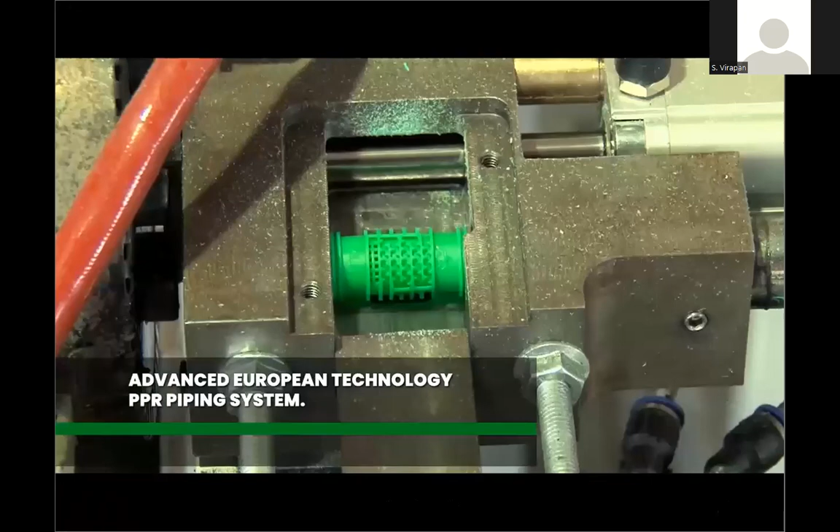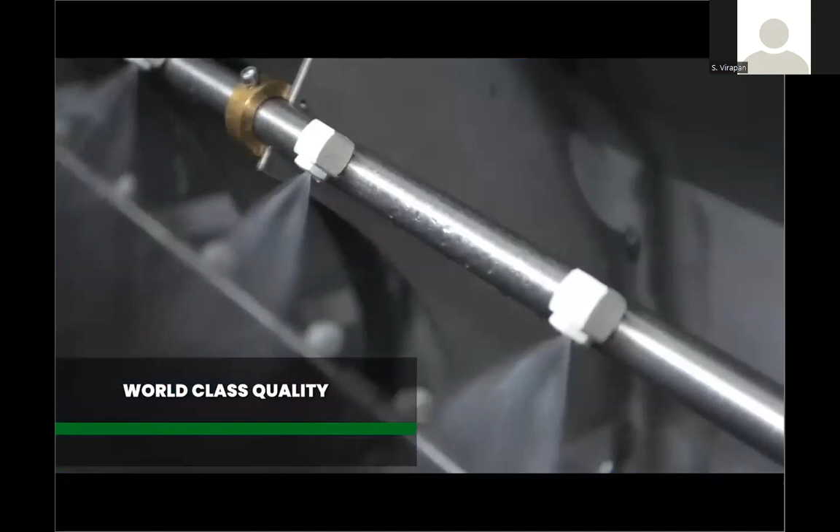A leader in polypropylene random copolymer piping systems, KPT Piping System has a state-of-the-art multi-specialty piping manufacturing facility and uses non-toxic, food-grade, highly strength fusion weldable raw material for production. To ensure world-class quality, KPT brings you a piping system made with R200P PPR raw material, 100% Hyosung from the Republic of South Korea.

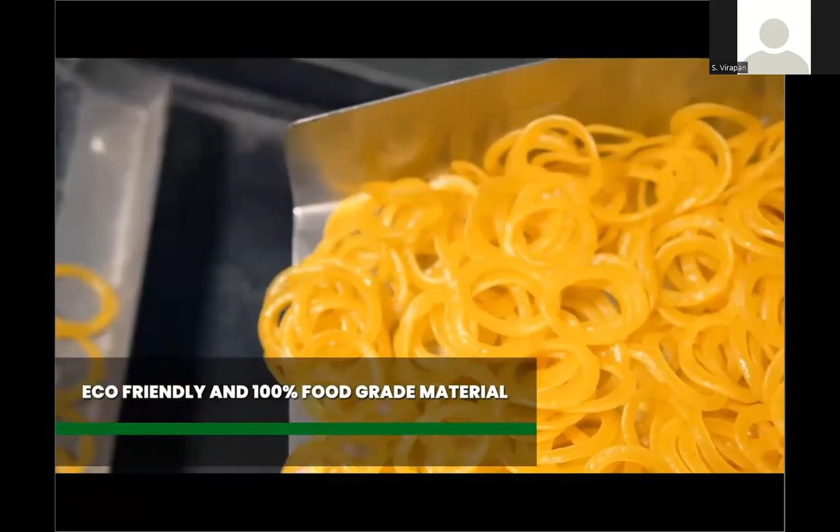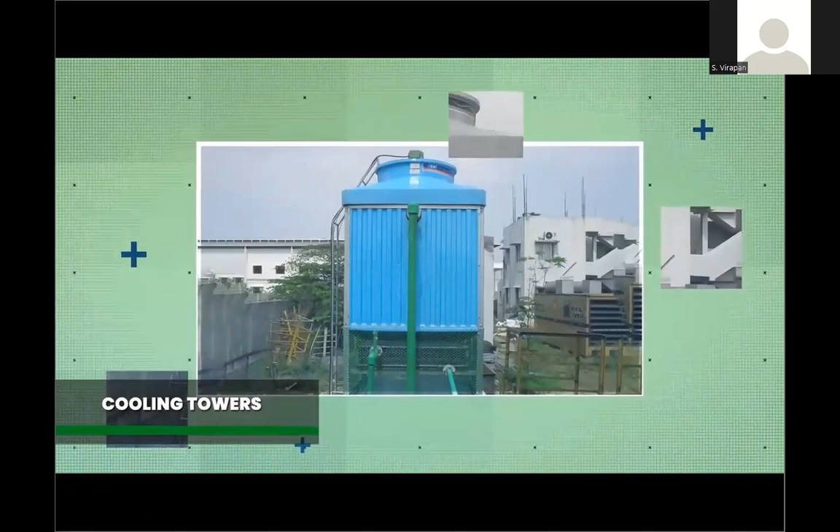PPR pipes are eco-friendly, 100% food-grade material, and resistant to most chemicals. PPR piping system is now widely used in drinking water, compressed air, cooling towers, firefighting, acids, RO, DM, ETP water applications, offering a longer lifespan of 50 years.

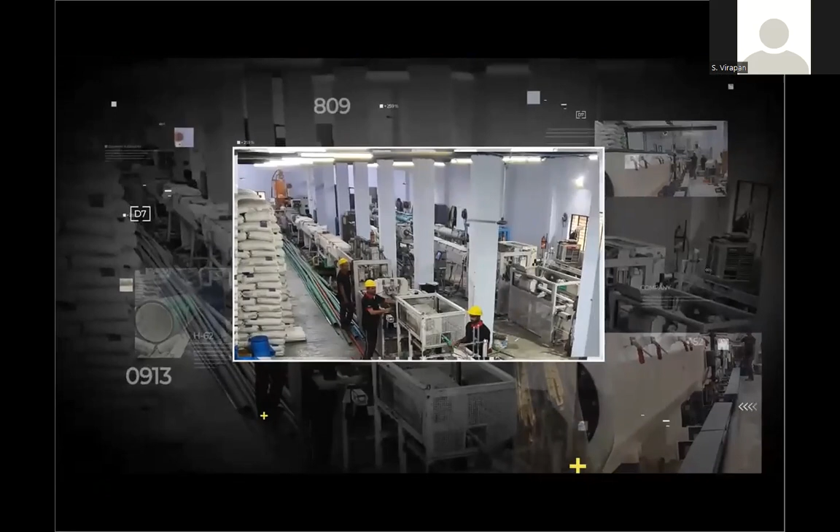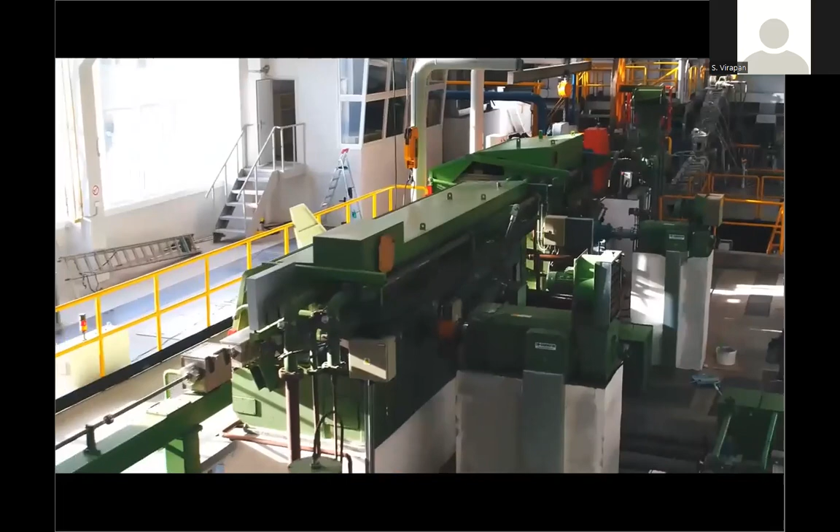With world-class PPR raw material and state-of-the-art production facility, KPT has successfully completed 2,500 plus complex projects for various industrial, commercial, and government organizations. Our piping system is now running for most critical applications like data centers, injection molding factories, and chillers all over India.

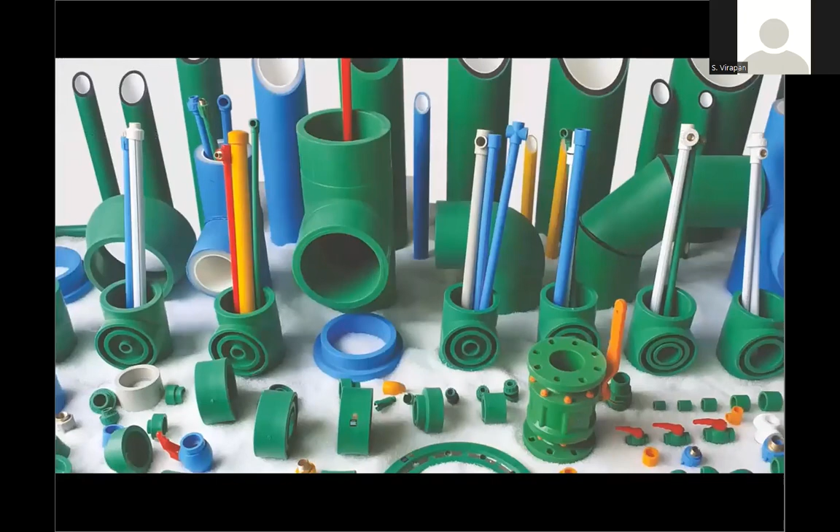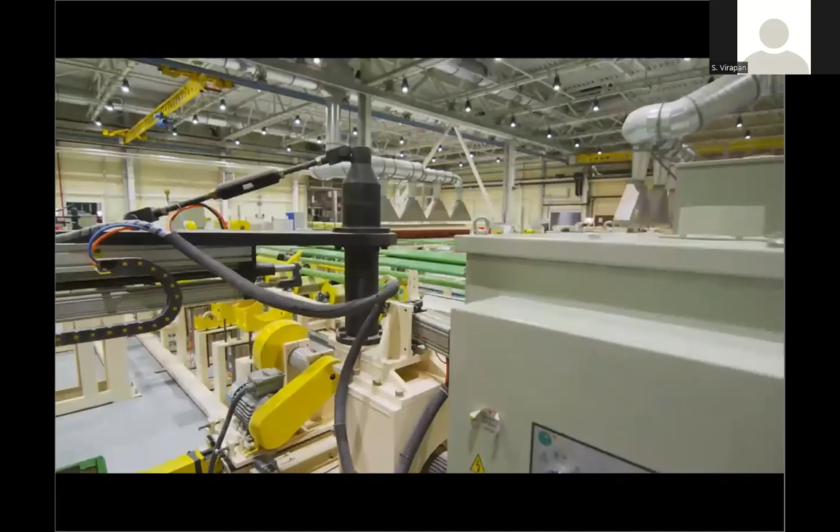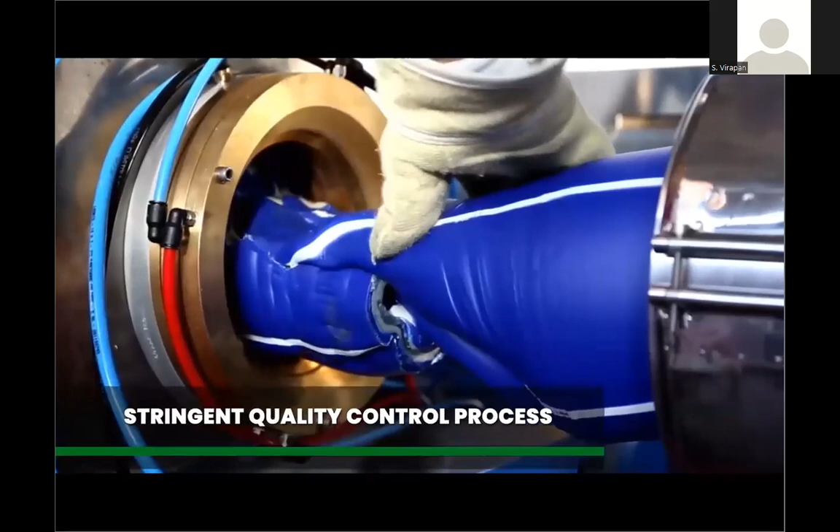Our product ranges: Pneumatopipes for compressed air, Green Therm for water applications, Thermoplast for firefighting systems. KPT's manufacturing facility, lab, and infrastructure feature a full-fledged, fully automated manufacturing facility with capacity to produce 15 metric tons of pipes per day. The unit has a fully equipped lab for material testing and quality assurance, adopting a stringent quality control process to ensure customers get only the best anytime, every time.

Our achievements: winner of India 5000 Best MSME Award for outstanding contribution in quality and excellence in customer satisfaction, and Pride of Bharat 2021 for the most trusted pipes manufacturer and supplier of the year. Our esteemed members: FIEO, Federation of Indian Export Organizations; CII, Confederation of Indian Industry; EEPC, Engineering Export Promotion Council. We believe innovation and quality are key to delivering world-class products. For over 13 years, we have been working to deliver excellence to all our stakeholders.

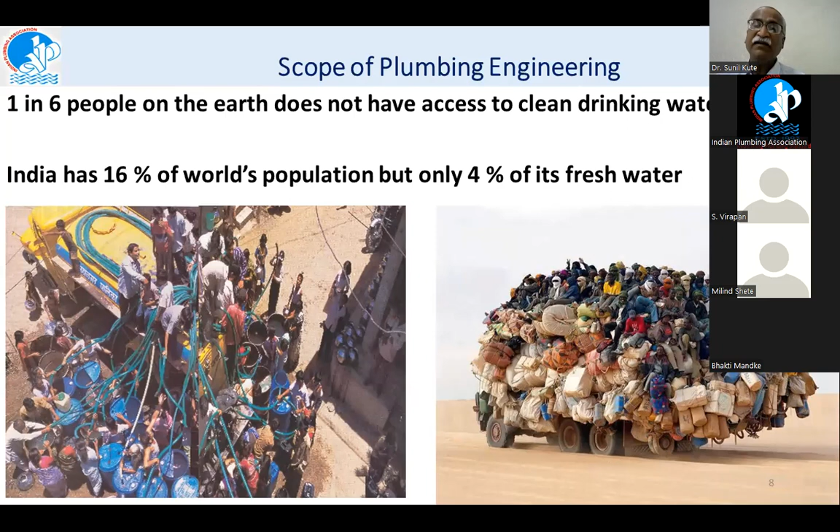So many different industries and ministries are focused on the water aspect. In India itself, there are at least six ministries focusing on water, be it the water resources ministry, food ministry, environment ministry, rural development or urban development, and agriculture ministry. All these different ministries are associated with water.

Plumbing is also associated with water. So in a country like India, there are six different portfolios handling water, and subsequently touching plumbing engineering. We have a great scope of plumbing in India.

Another very interesting thing you would like to know is that the potential working age in India is in the range of 20 to 59. Of the total Indian population of 130 crore, over 76 crore of this population is in the range of potential working age.

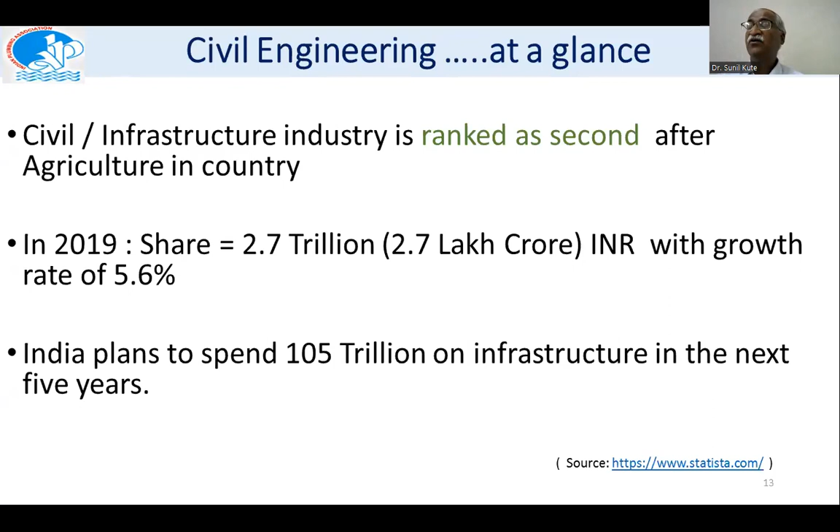You know that in civil engineering, can you think of any single building without plumbing? This entire economy dedicated to civil engineering infrastructure, the building sector, has a very huge contribution, and you cannot think of this sector without plumbing. So there are good opportunities for civil engineering students in the plumbing curriculum and plumbing engineering.

From that point of view, we in the education field are now introducing plumbing education in our curriculum. Being chairman of the Board of Studies at Savitribai Phule Pune University in Maharashtra, I got the opportunity to start plumbing engineering as one of the UG subjects for a full-fledged 100 marks. We have started this at Pune University.

Over and above that, if you look at the SDGs, the Sustainable Development Goals declared by the United Nations, we have tried to incorporate and map these Sustainable Development Goals with the plumbing engineering syllabus, and that has enhanced the career opportunities for the students.

Very recently, in 2020, the Government of India declared the National Education Policy 2020, in which I will take a brief glance at how they have provided good scope for plumbing. We'll see this one by one.

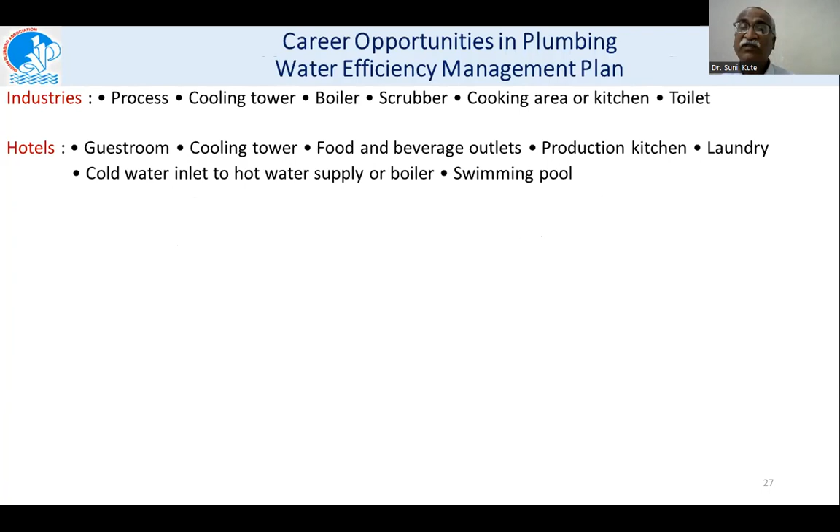Let it be tertiary institutions, prisons, military or defense installations - there also we have scope for plumbing engineering. Hospitals are also a good scope for plumbing engineering.

The construction sites and concrete batching plants - we cannot think of these aspects without plumbing, or even sports or recreational facilities or tourist attractions. There will be cooling towers, washing areas, toilets, food outlets, irrigation, swimming pools. All these different aspects are once again vouching for good career opportunities in plumbing engineering.

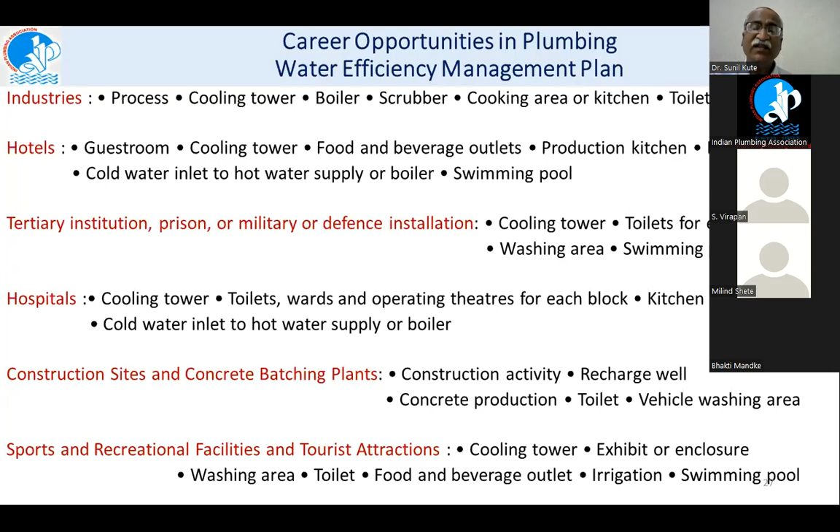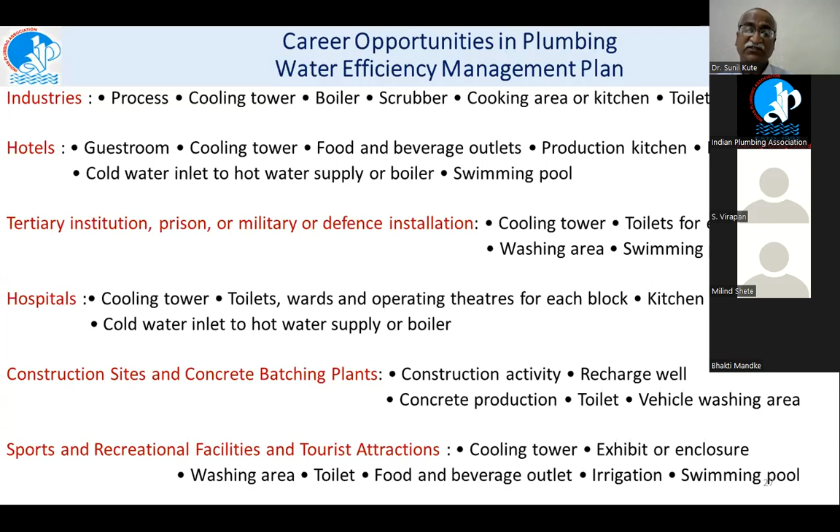So these are not only industries, not only units, but these are the opportunities which I would like to highlight through this list. We have different aspects through which services are provided to all these different sectors, and all these sectors will need plumbing engineering, plumbing engineers. All these needs can be catered to by different positions as career options in plumbing engineering.

We can start our own consultancy as green building consultants, or open consultancy in project management teams. Some entrepreneurs can think of becoming manufacturers of different plumbing engineering components. We can act as water experts, go for design consultancy, or go into sales. Those interested in field implementation can go for supervision. Some of the girls may prefer an office job - yes, administration is also there.

MEP consultant, mechanical, electrical, and plumbing, they nowadays go hand in hand at many sites. So as a MEP consultant, you can find that plumbing is such a wonderful activity that explores so many different aspects of career options. It is not only field related. Let it be office, field, consultancy, manufacturing unit, MEP consultant, supervision, or sales, you can find good career opportunities.

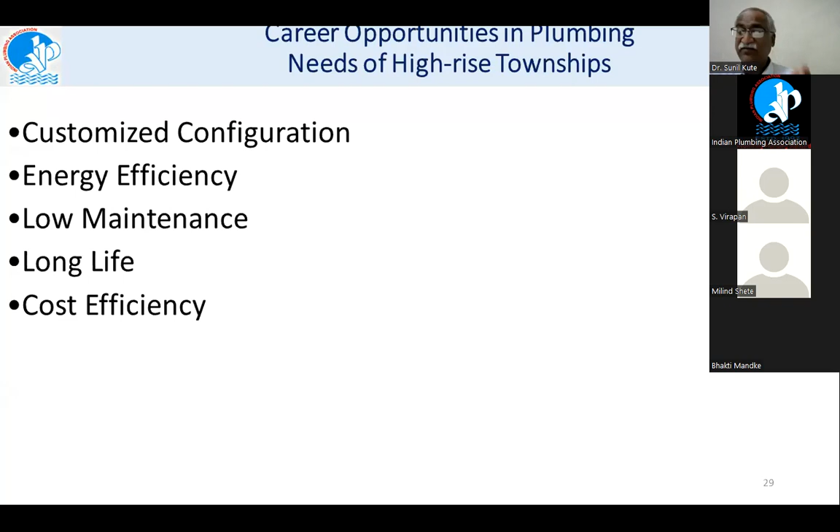You can see now that if there is a job of customized configuration of the entire project, high multi-story building, you have good scope to cater to the needs of this aspect. If there is a need of energy efficiency, you can go for that. So as a plumbing consultant, you can explore a number of areas here, and that is very helpful to all of you.

We have some special tasks, operations, and jobs in the systems of multi-story buildings, high-rise structures. Airflow systems are required, which are specialized jobs. If you think in medical terms, if you want to cater to the needs of an MBBS doctor, yes, there is scope for you. If you want to go for MD or MS, yes, specialized topics are also available.

So those who want to become a little more on the upper level of consultancy, specialized jobs, you have some such kind of areas to explore in plumbing engineering, where you can go for stack fluid mechanism in high-rise buildings with a number of different drainage options: dual pipe system with vent stack, single pipe system fully vented, single pipe system partially vented, or single stack with air admittance valve. These are some specialized areas where you have to play your significant role.

Venting and air movement, hydraulic jump, trap seal depletion, stack pressure control. These are some of the areas in plumbing engineering which require experts.

So gone are the days when the entire house, ground floor or at most ground plus one, was handed over to an illiterate plumber. Now with all these sophisticated towers and big townships coming up, we cannot rely upon illiterate plumbers. So we need plumbing not as a job of skills, but as a job of full-fledged knowledge. It is a job of engineering, and a job of experts. From that point of view, you will find that the dimensions of plumbing engineering are very vast.

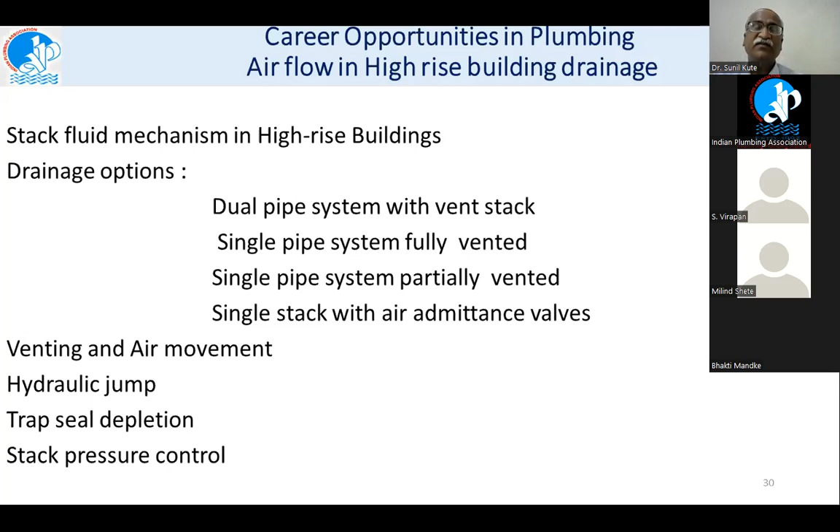This canvas is very vast, and you have opportunities at every level. If you are a diploma holder, yes, supervision job is there. If you are a BE or MTech, yes, you have consultancy scope, or you can have specialized scope in plumbing. There are certain career opportunities in various areas of plumbing.

Plumbing is directly related to various areas like effective dewatering, zero discharge campuses. This is a new avenue for plumbing engineering, as we are now focused on zero discharge campuses due to day-by-day scarcity in water resources. Let it be residential, industrial, or educational campus, there is a new theme of circular economy: recycling, reuse, reduce. All these concepts of circular economy are directly handled by effective plumbing solutions only. That's why we can become consultants in circular economy by catering to the needs of all these different areas.

Underground pipe systems, I will explore at the end of this part, not only in residential areas but in agricultural areas also. We have scope to attain this aspect.

Rainwater harvesting system is a need of the time, and in many metro cities nowadays, your house plan cannot be approved if it does not have a rainwater harvesting system. So for each and every house hereafter, particularly in some cities, they have put a ceiling limit of square feet area. If you have 500 square meters and above, you need to install this plant.

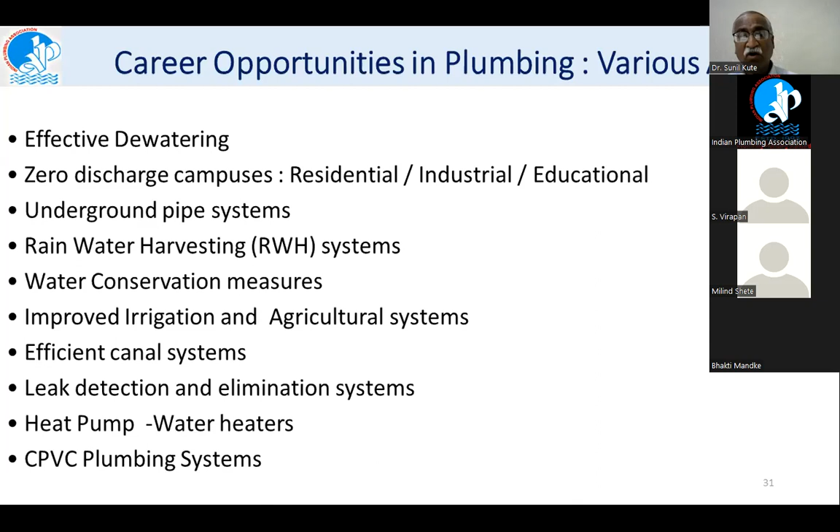If you belong to a rural area, you can explore good career options in this aspect too. Efficient canal systems, leak detection and elimination systems, heat pump water heaters, CPVC plumbing systems - these are all areas where we have great scope to cater to the needs of plumbing engineering.

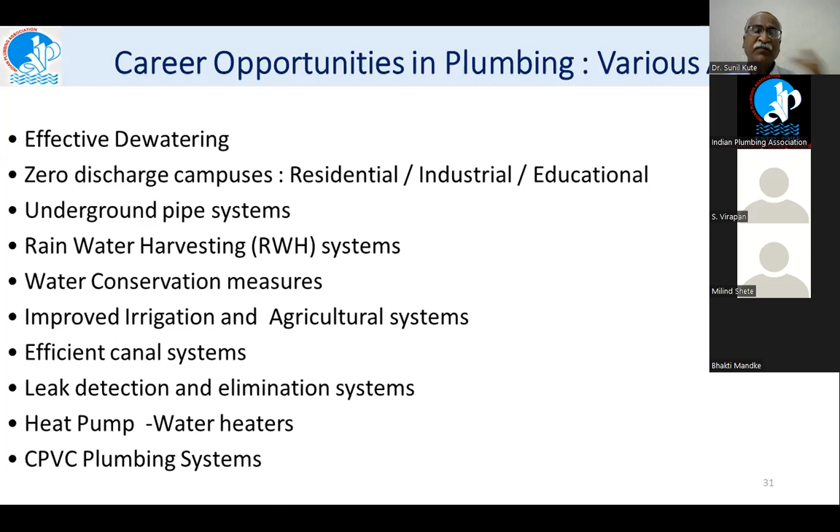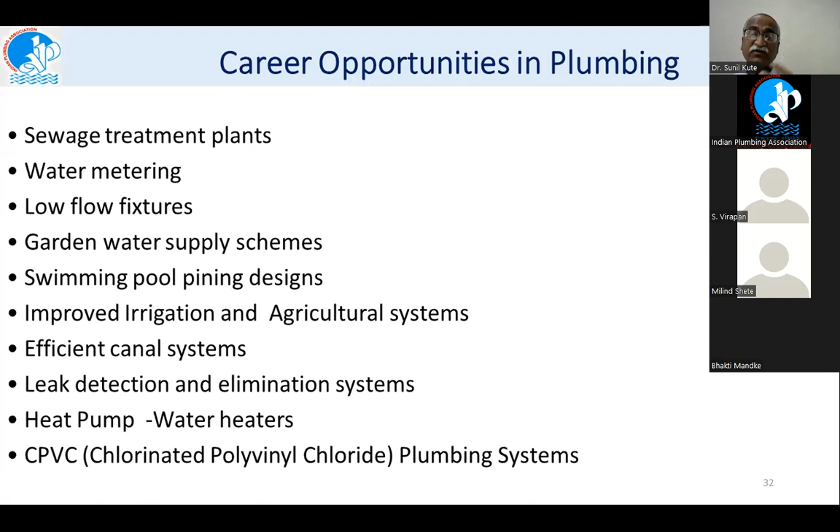These are the different fields, the different areas where we can apply various aspects of plumbing knowledge. Sewage treatment plants, water metering, low flow fixtures, garden water supply schemes, swimming pool piping designs, improved irrigation and agricultural systems, efficient canal systems, leak detection - all these things we should explore from a career point of view.

There is one more specialized aspect in plumbing engineering, and I congratulate the Indian Plumbing Association, IPA, for starting the Green Pro certification. Green Pro certification differentiates green products from the competition. A life cycle approach is adopted, through which product design, procurement of raw materials, manufacturing, use, disposal, and recycling through circular economy are covered.

Who will issue this certificate? Again, plumbing engineers have another area for consultancy through this entire thing. So we have to explore all these things.

So those who want to pursue PhD or a career in R&D have good areas to explore in plumbing engineering, like building information modeling (BIM), SCADA systems, artificial neural networks, fuzzy logic, genetic algorithms, decision support systems for optimization, and site monitoring through web technology. These are all advanced technologies with sound applications in plumbing engineering.

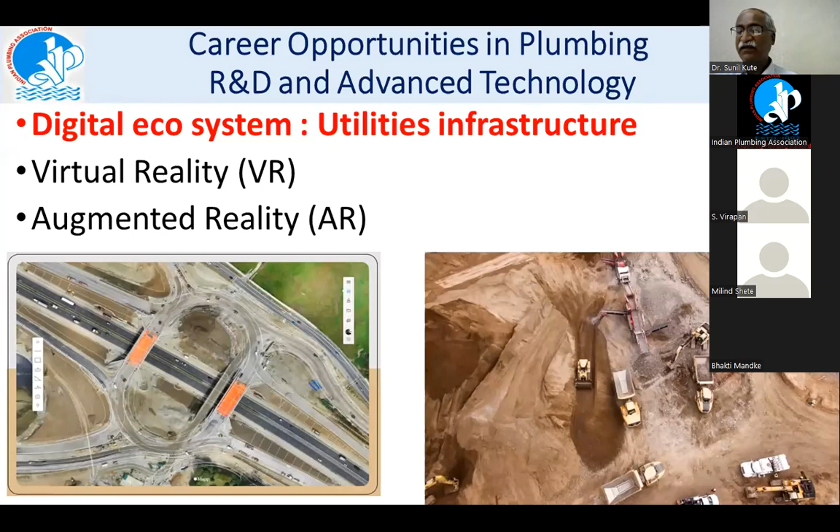You can see these digital ecosystems developing day by day. India is now one of the fastest growing countries. Conventional monitoring of the site will no longer exist in future - the future is of virtual reality and augmented reality. Civil engineers along with computer engineers, IT engineers, and electronics engineers can find a nice scope of career in plumbing engineering in the area of VR and AR.

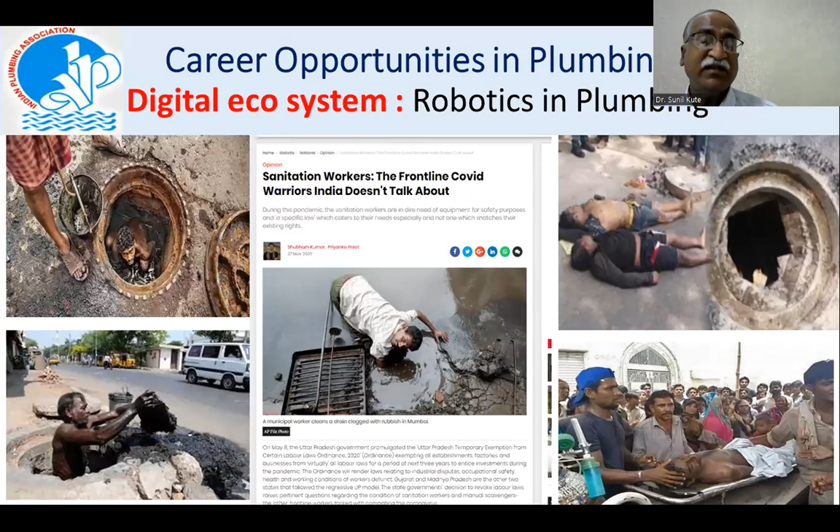We know that the digital ecosystem can focus on robotics in plumbing too. There are so many incidents happening which we can avoid by use of robotics in plumbing engineering. So it is not only the domain of civil engineering - now even a robotic engineer can find career options and opportunities in plumbing engineering.

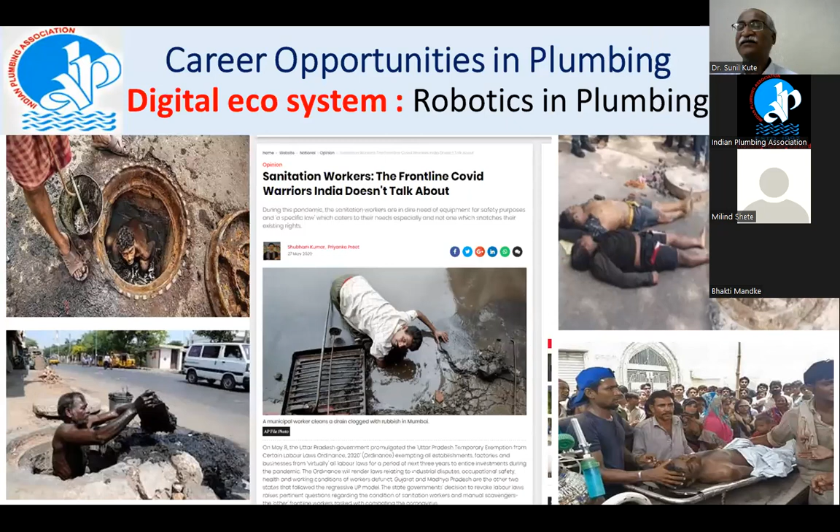So now you can realize that the scope is unlimited. All branches can explore scope here in engineering. If you are in the field of town planning, you can also apply the aspects of your knowledge for an efficient plumbing system through your town planning aspects.

The slum rehabilitation cannot be thought of without the plumbing. We know population density in India in some of the cities is very, very high. Dharavi, it is 277,000 people residing only in 1 kilometer square area. Can you think of this? How to supply potable water, clean drinking water, easy, efficient plumbing to these areas? From the slum rehabilitation, plumbing plays a very important role.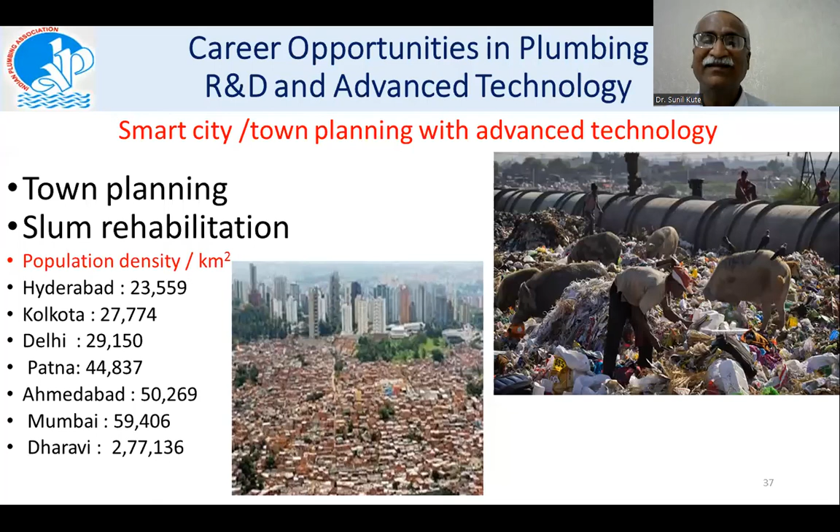In India, we have a huge population. We are second in the world and soon going to become first. But can we explore that in terms of opportunity? Such a huge population means what? We cannot think of the population without water. We cannot think water without plumbing. And hereafter we cannot think of our career without plumbing. So all things are mapped with each other. The infra sector, which includes energy, water, transport, solid waste management, its modeling - again, plumbing will play a very important role.

Rainwater harvesting in smart city, automation of taps in hotels and all untapped locations, vertical farming and hydroponics, sensor technology, surface and subsurface planning of city - is it not related with plumbing? Can you think of sensor technology and its application in plumbing? It is a good scope of use of advanced technology. So for that sake, electronics engineers and robotics engineers can find the scope here.

The hydroponics and vertical farming need special type of plumbing connections, special type of flow adjustments, special types of velocity and pressure calculations. It's the job of plumbing engineering. So let it be smart city or town planning, again you can explore good opportunities of career. In the area of R&D and advanced technology, let it be startups, computer engineers, artificial intelligence, data science, robotics, use of drones or sensors, or for that sake academic projects - you have good application of advanced technology in plumbing area.

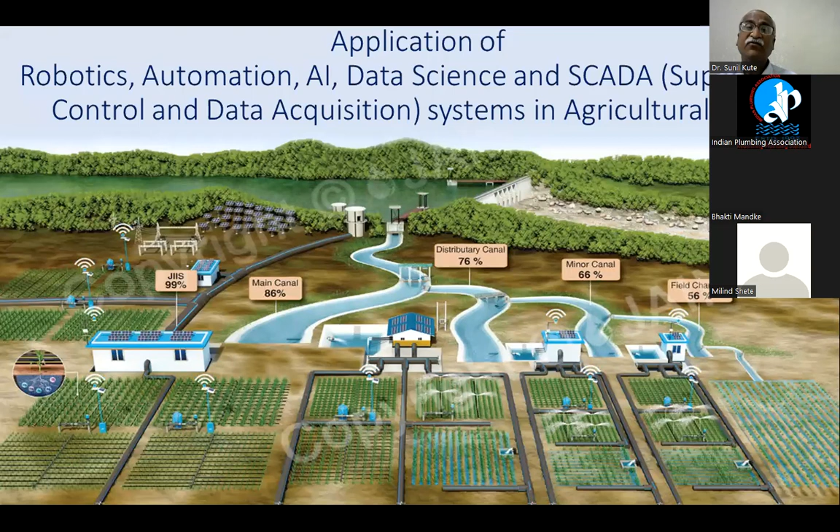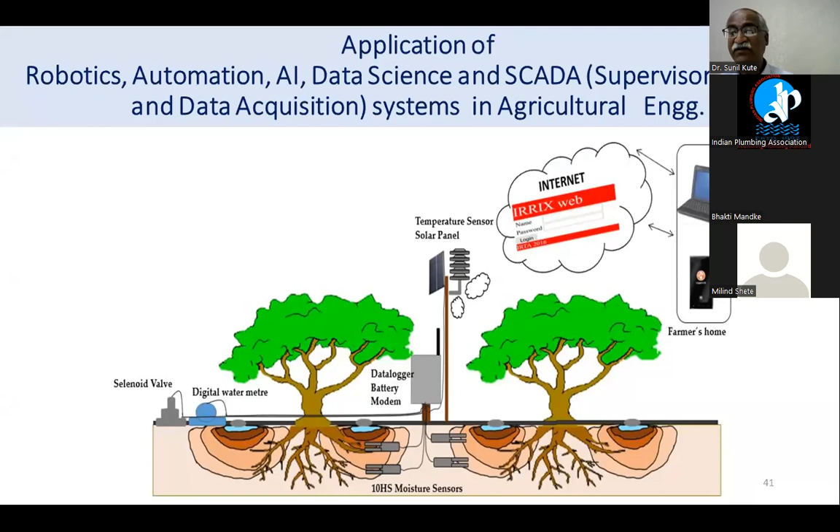I was referring to underground systems where you have a root zone and optimum utilization of water by supplying water to the root zone of the crops only. There also you have good scope of web technology, sensor technology, solar technology, integrated with the civil engineering knowledge of plumbing engineering. So you go on exploring, and you will find that plumbing has application in each and every sphere of life, each and every dimension of life. In agricultural engineering also, for the root zone depth of plants and crops, we can have good application of technology too.

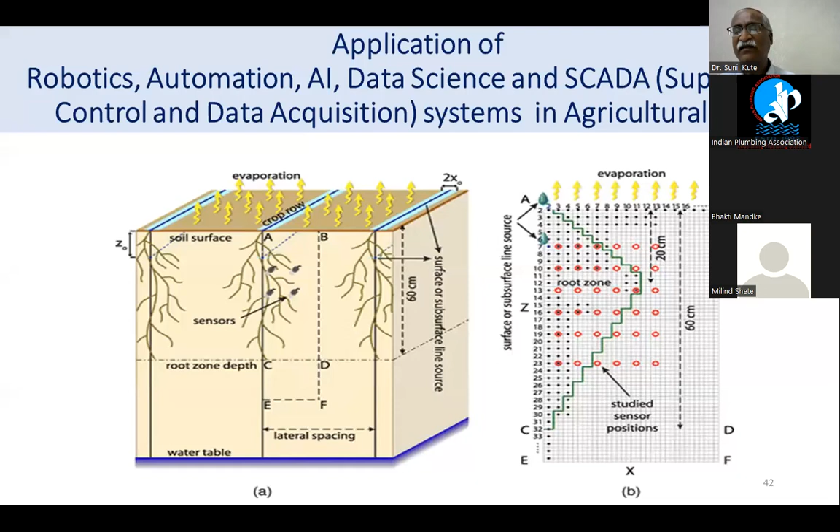And we know India is an agricultural country. India's first industry ranks agriculture, second is civil engineering, and fortunately, let it be agriculture or civil engineering, infrastructure engineering, we are connected with plumbing through both these sectors. Through plumbing, we are connected. Plumbing is an integrated part of agriculture as well as civil engineering. And fortunately, these are the two top leading sectors in India. Therefore, we have good scope for plumbing engineering here.